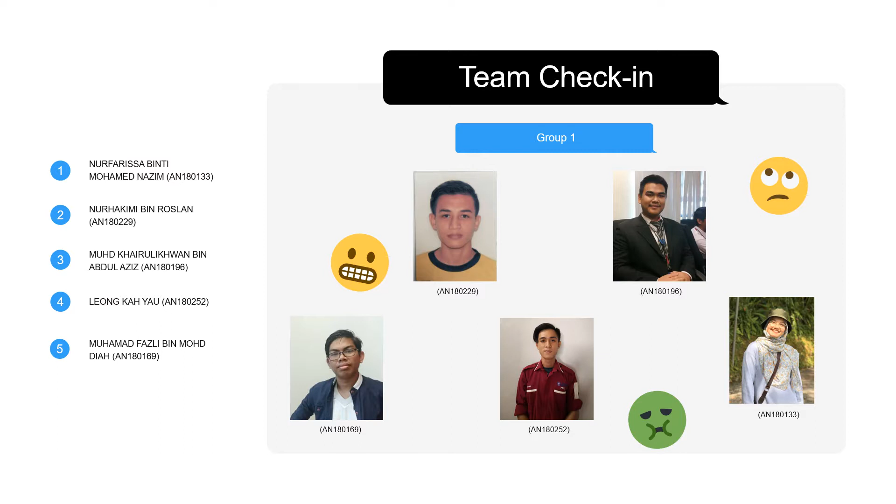Today I will present regarding the infrastructure part in our project. So without further ado, I will introduce to you all about this company.

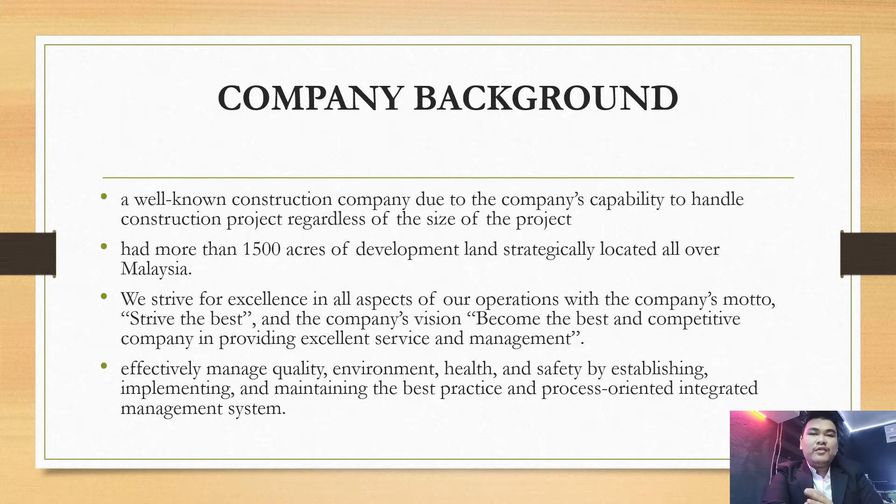Our company is a well-known company capable of building large areas of sites, where we can handle more than 1500 acres of land across Malaysia, and we target to make it full in quality, safe in environment, and safe in health. So next, we move to the project background.

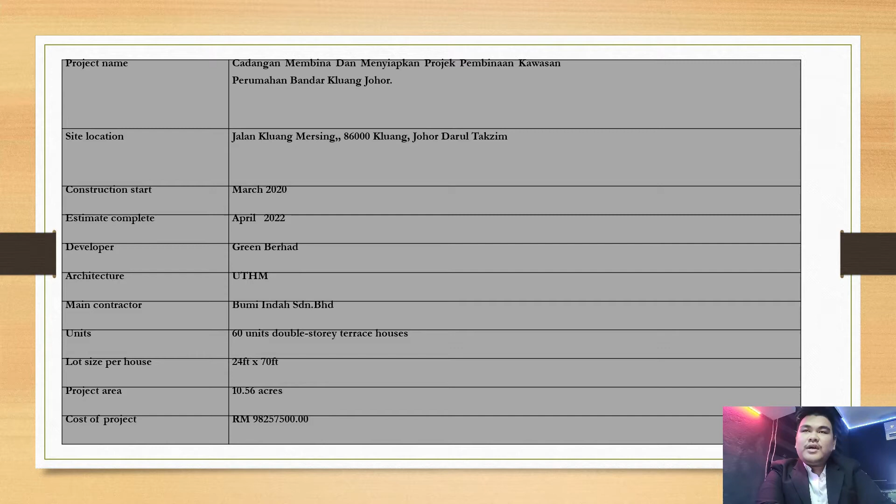In the project background, the project name is Cadangan Membina Perumahan, and the site area is around Kluang, Jalan Kluang and Mersing, where the project will start in March 2020 and end by April 2022.

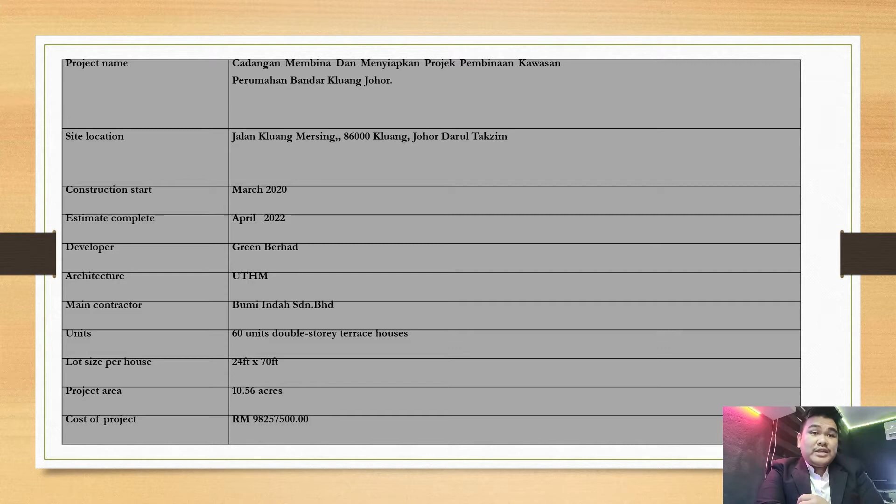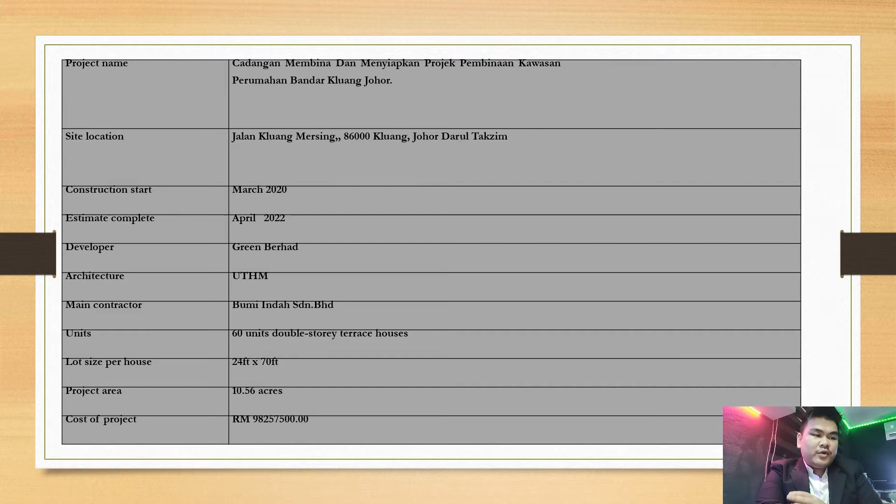The developer is Green Berhad, and the architect is UTHM, and the plan is to build 60 units of double storey houses where the house lot is around 24 feet by 70 feet for each house, and the area for this project is 10.56 acres.

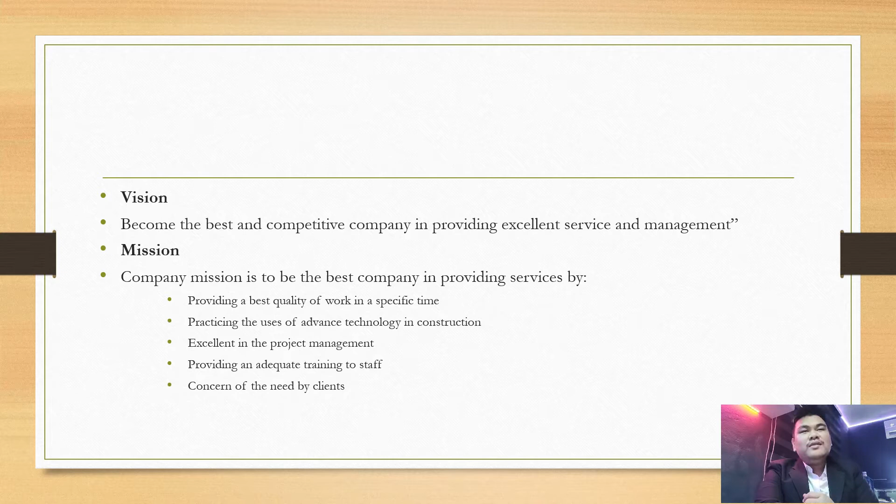Our vision for our company is to become the best and most competitive company across Malaysia. And the mission is to provide the best quality using technology in our construction and so on.

Now I will talk about the infrastructure activities involved in our project.

First of all, for the earthwork, for the proposed level, enough temporary drainage should be supplied during the building of earthworks. The earthworks contractor should examine the drainage solutions that are necessary and utilize their expertise and experience to guarantee that the temporary drainage provided is adequate.

The proposed level chosen for this project is 56.12 meter. This is because, according to the earthwork arrangement, the proposed level closest to the sedimentation pond is 56.12 meter. As a result, by maximizing the appropriateness of excavated material and minimizing the possibility of material corrosion or work instability, this also ensures the success of the earthworks.

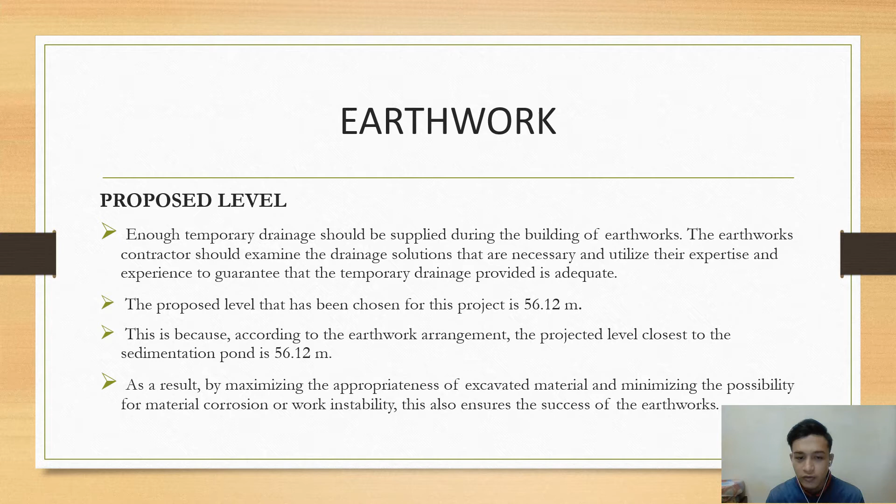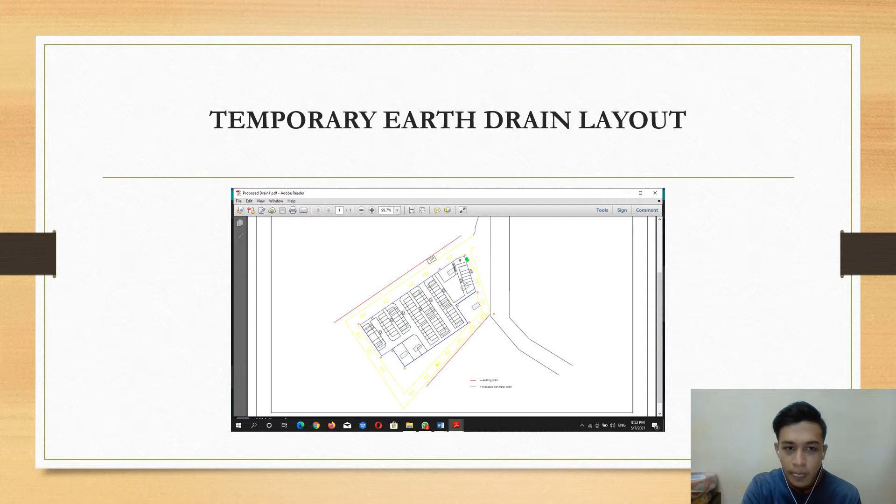For the proposed sedimentation pond location, the use of temporary ponds for sediment management is commonplace on many building sites. After the construction phase, these ponds are occasionally rebuilt and utilized as permanent stormwater control ponds. Additional depth is necessary for sediment storage in between cleanout processes. As a result, the proposed sedimentation pond's closest platform level is 56.12 meter, and the proposed sedimentation pond's depth is 2 meter. So the sedimentation pond's level has risen to 54.12 meter above sea level.

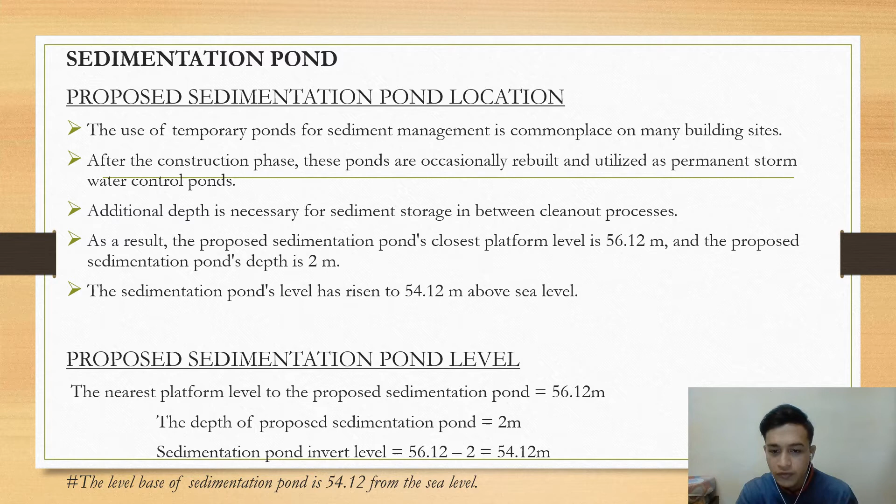The proposed sedimentation pond level: the nearest platform level to the proposed sedimentation pond is 56.12 meter. The depth of the proposed sedimentation pond is 2 meter, and the sedimentation pond invert level is 56.12 meter minus 2 meter, giving a value of 54.12 meter. So the base level of the sedimentation pond is 54.12 meter from sea level.

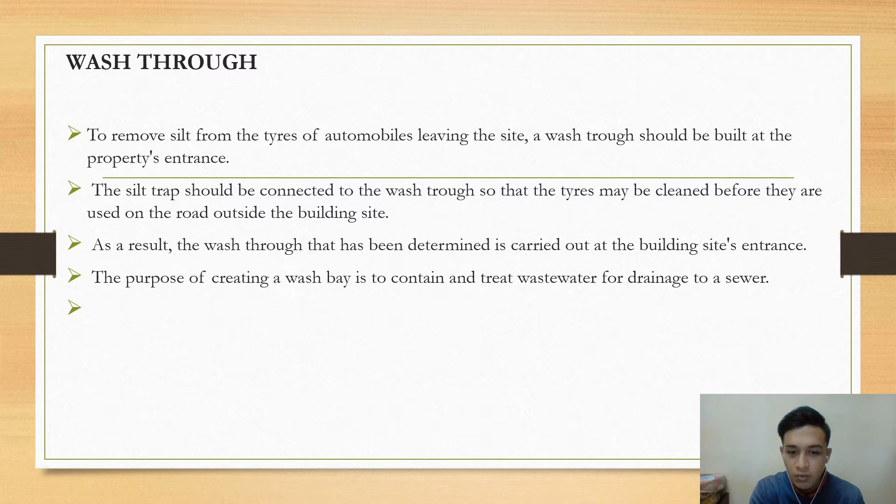Wash through: to remove silt from the tires of automobiles leaving the site, a wash trough should be built at the property's entrance. The silt trap should be connected to the wash trough so that the tires may be cleaned before they are used on the road outside the building site. As a result, the wash through determined is carried out at the building site's entrance. The purpose of creating a wash bay is to contain and treat wastewater for drainage to a sewer.

Grid method: the grid method involves drawing a uniform grid onto a plan of the earthworks project and taking off the existing and proposed ground levels at each grid node. With these values, the average depth of cut or fill required on each cell of the grid is calculated, and the volume for each cell is obtained by multiplying the depth by the cell area. Adding the volumes for each cell together, the total cut and fill volumes for the project can be estimated.

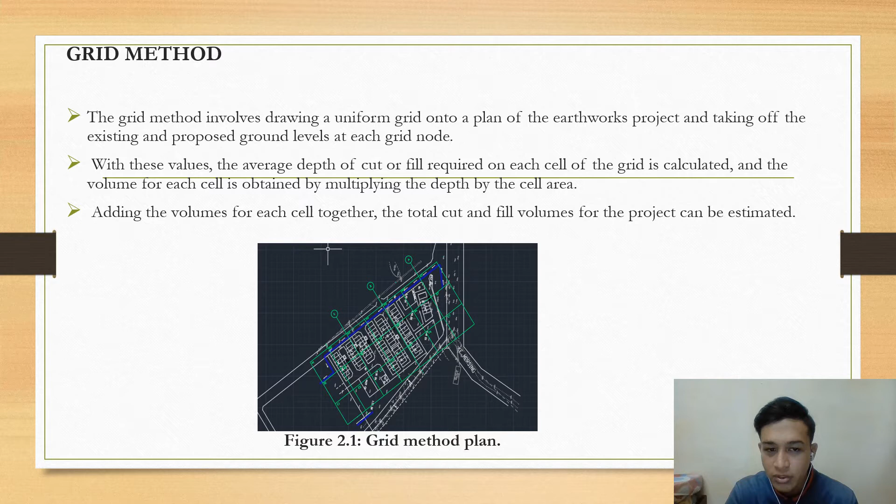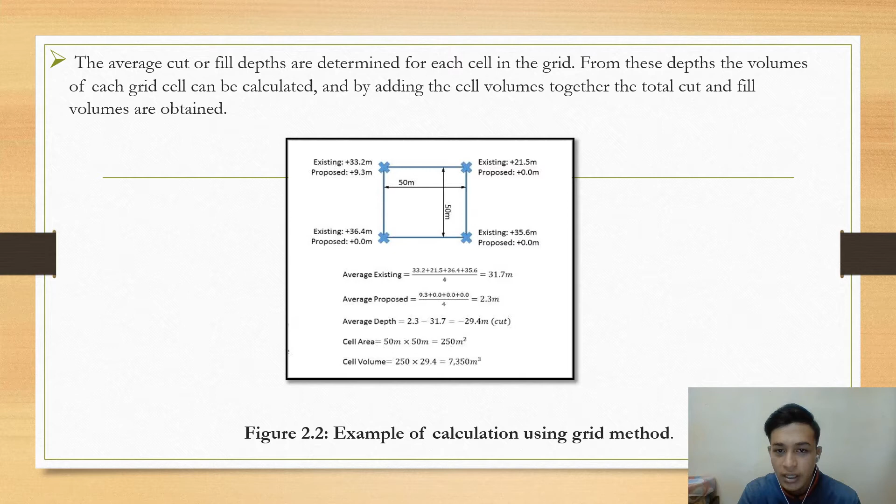The average cut or fill depth is determined for each cell in the grid. From this depth, the volumes of each grid cell can be calculated, and by adding the cell volumes together, the total cut and fill volumes are obtained.

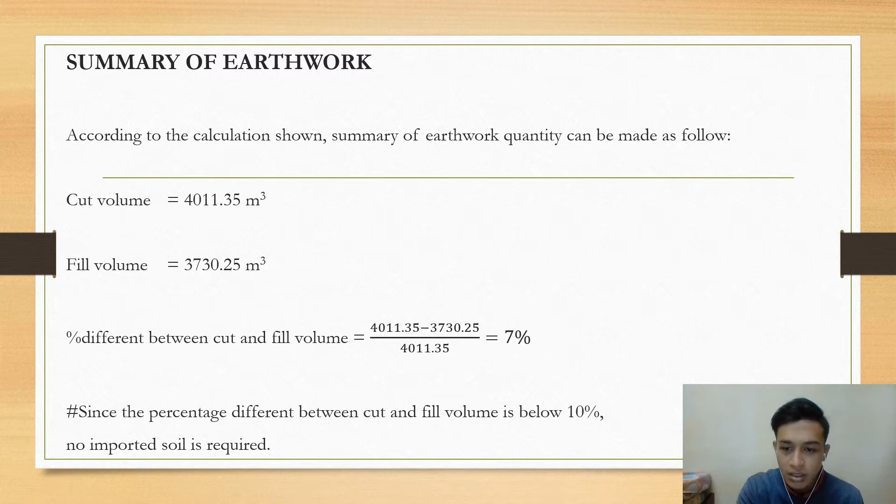Next, we go to the summary of earthwork. According to the calculation shown, the summary of earthwork quantity can be made as follows: cut volume is 4,011.35 meter cube, fill volume is 3,730.25 meter cube, and the percentage difference between cut and fill volume is 7%. Since the percentage difference between cut and fill volume is below 10%, no imported soil is required.

Right, so I'm going to continue with the water reticulation.

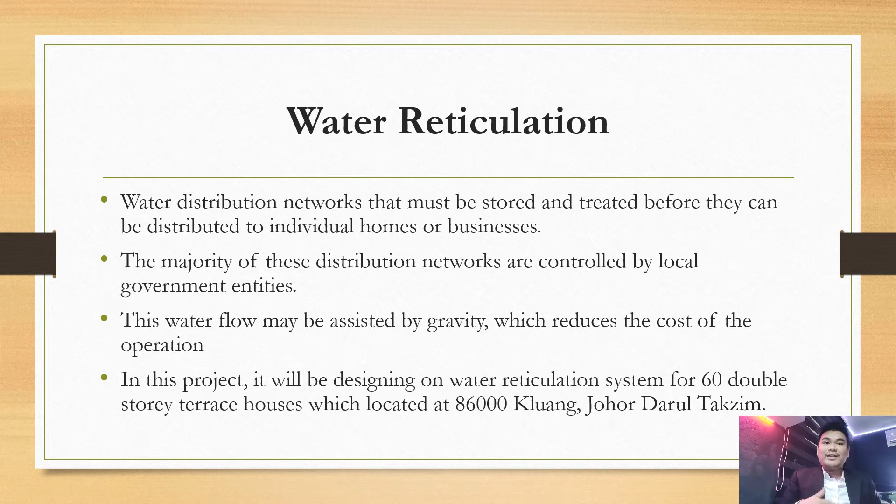So what is water reticulation? Water reticulation is a system of distribution networks of the water, usually controlled by local government entities, and water flow is controlled by using gravity, as we can reduce the cost in construction of the water reticulation itself. So in this project, we are designing for 60 double story houses, and we are planning to cut all of the costs and become environmentally safe.

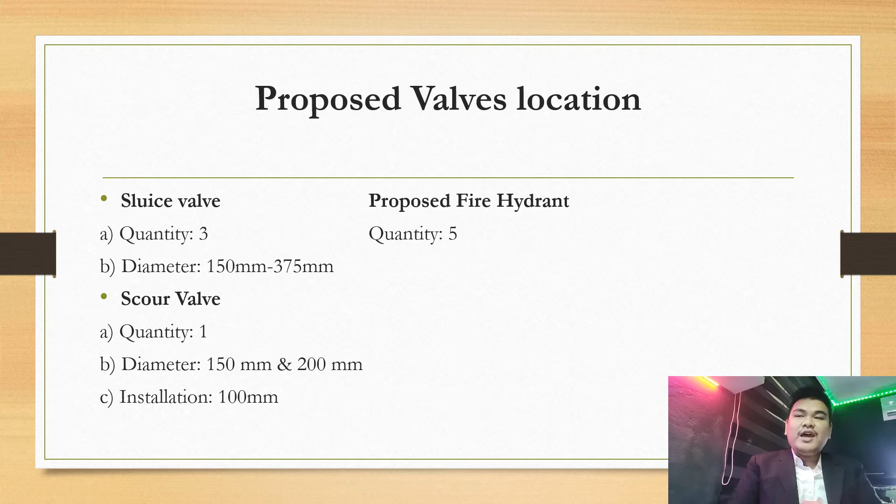Next, we continue with the proposed valves location. The sluice valve proposed quantity is 3, with diameter 150 to 375 millimeters. The scour valve proposed quantity is 1, with diameter 150 and 200 millimeters, and installation around 100 millimeters. For the fire hydrant, proposed quantity is around 5.

105,890 liters. So the new proposed level for our site is 62.63 meters, and the existing is also 62.63 meters. So we can see here that the distance of the tapping point to bulk meter is around 5 meters, and distance from bulk meter to suction tank is around 7 meters.

And then having a calculation of the tapping point to bulk meter, the residual head pressure at bulk meter is around 27.596 meters, and the bulk meter to suction tank, the residual head pressure at bulk meter is around 27.592. So this value is acceptable for our water reticulation proposed system.

So that's all from me. We continue with the next slide.

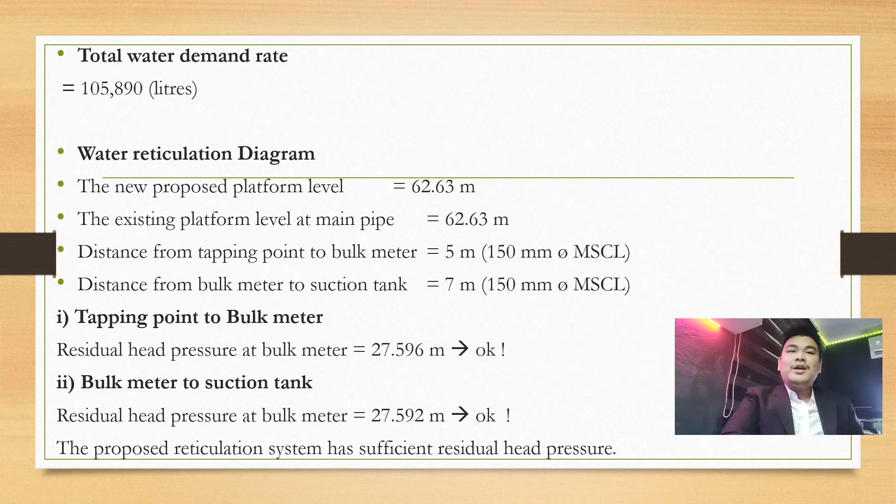Okay, next I will explain about sewage. The proposed sewerage design detail: the sewerage line will be installed along with manhole. The sewerage is installed at high place, and the end is at STP, where STP is the lowest place.

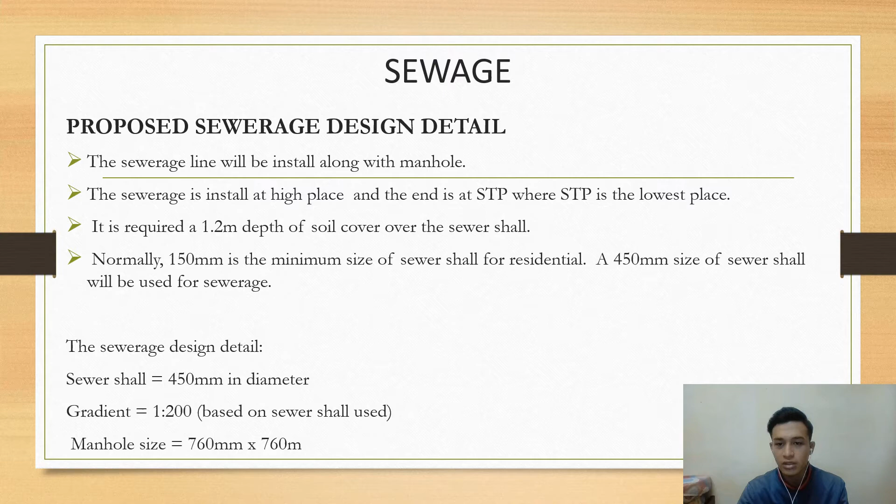Okay, next, this is the example calculation for MH1. Platform level is 64.8 meter, while manhole depth is 1.5 meter. So to get the invert level, platform level minus depth: 64.8 minus 1.5, and the value of the invert level is 63.3 meter.

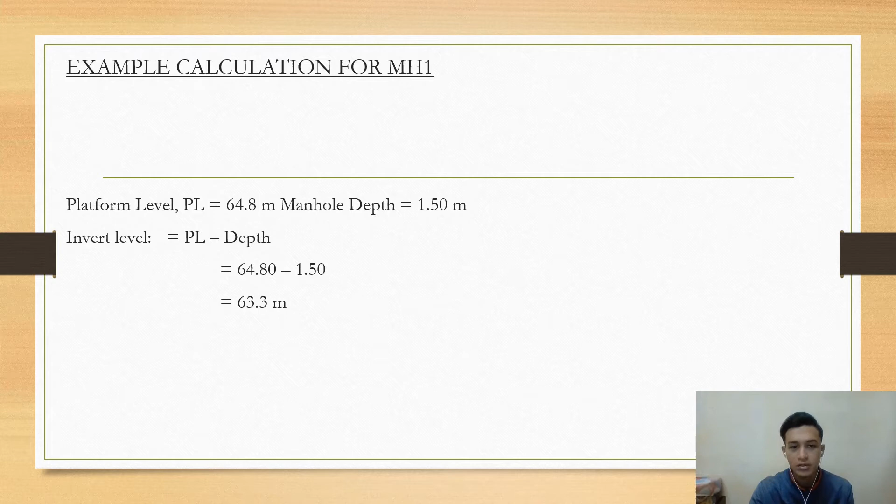Okay, next, the example calculation from MH1 to MH2. The value of x is 25 divided by 200 equals 0.125 meter. So the depth of MH2 equals depth of MH1 plus x: 1.5 plus 0.125, and the value is 1.625 meter.

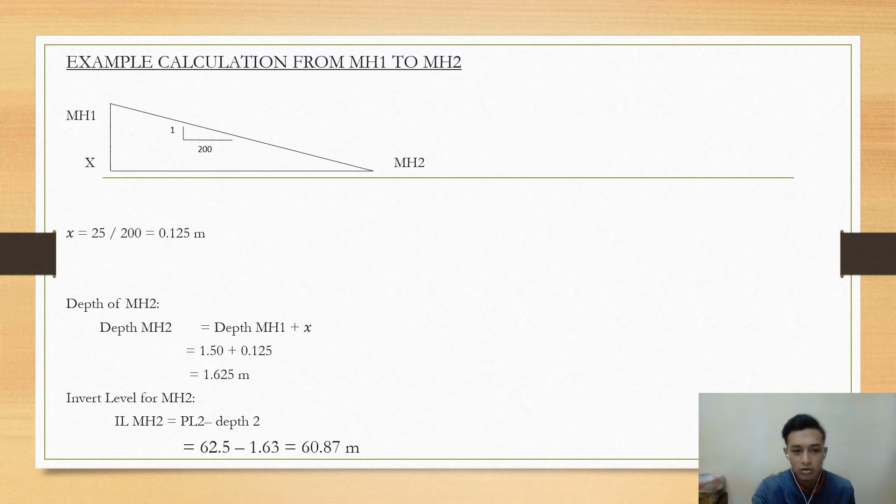Okay, next, for the invert level for MH2, it equals PL2 minus depth 2. So 62.5 minus 1.63, and the value of invert level for MH2 is 60.87 meter.

Okay, this is the sewerage flow direction. The red arrow is the sewerage flow direction for our project.

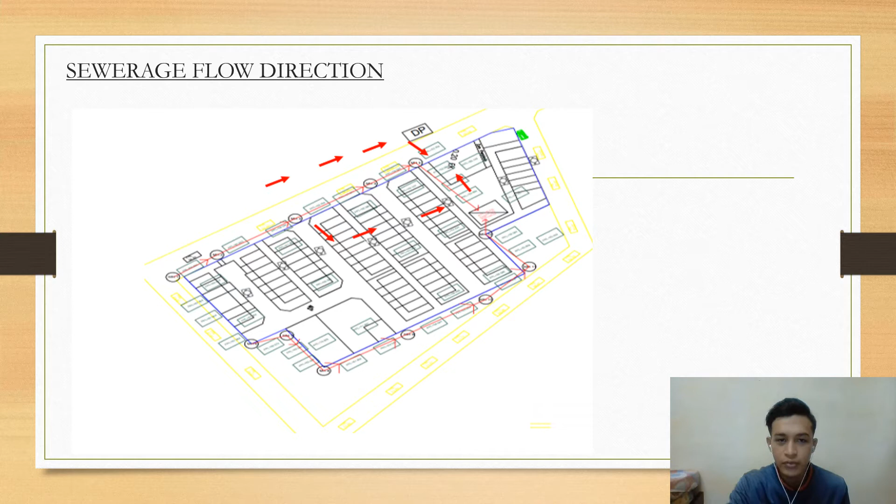Okay, next, the proposed sewerage treatment plant, STP. The wastewater which is discharged by sewerage line will flow to the collection center, which is called sewerage treatment plant, STP. STP will remove any contaminants from wastewater, and it is located at the lowest place so that the wastewater can flow directly into it.

The detail of STP proposed level is stated below. Based on the invert level of manhole, the proposed platform level is 49.2 meter. The depth of proposed STP is 2.57 meter, and the STP invert level is 46.63 meter.

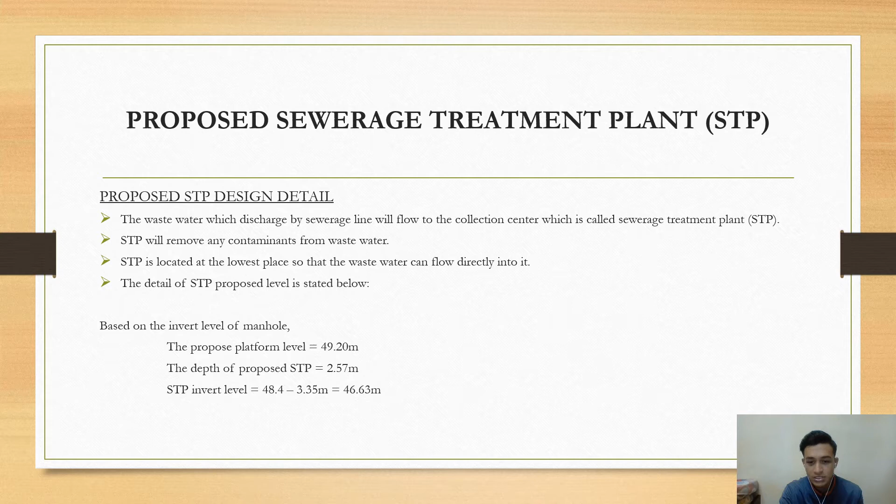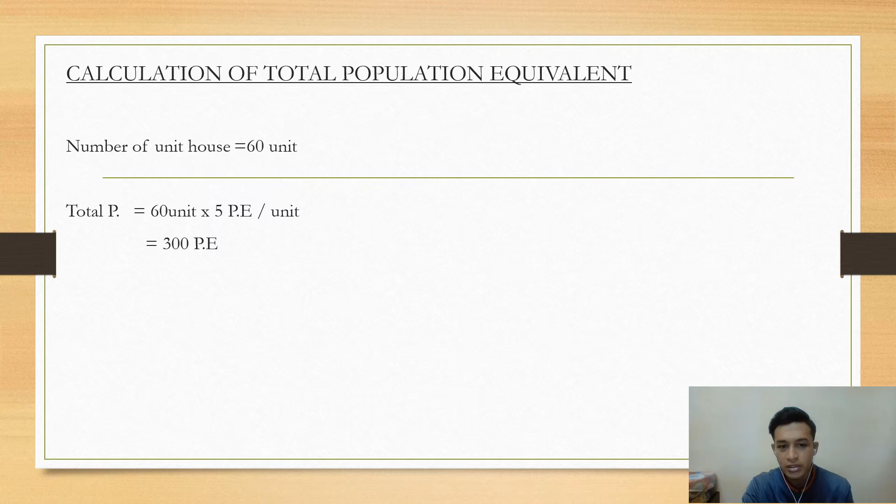Thank you. Hi everyone, my name is Leong Kai Yao. Now I will continue with the part of structure for this project.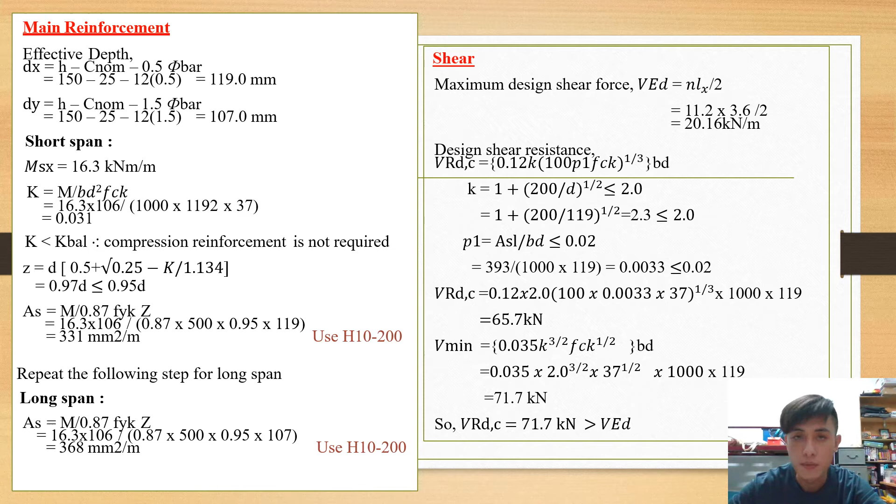The next step is for the deflection. We calculate for it, and also carry out the cracking check, and the result is satisfactory. So finally we can get the detailing for this two-way slab, also using reinforcement with H10 200.

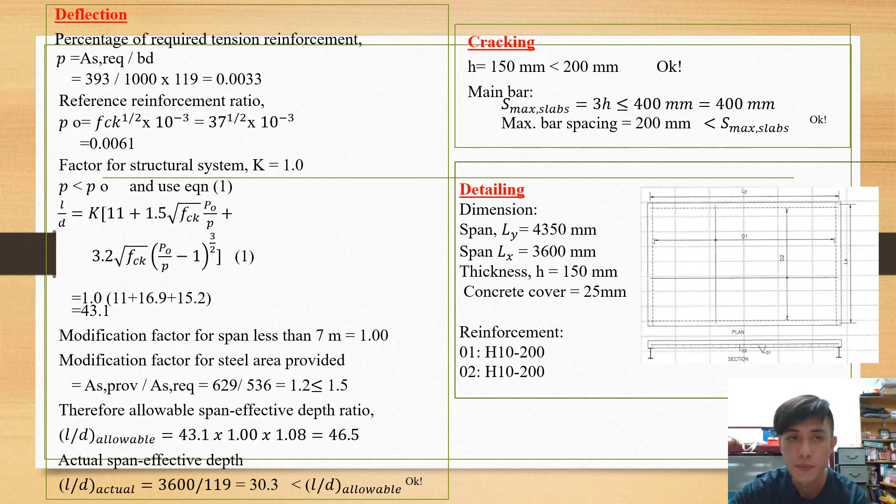As you can see in the figure, our chosen beam is beam 3/A-B, which has an effective span of 3450 mm. The characteristic permanent action on the beam is 15 kN per meter, and the characteristic variable action is 10 kN per meter, with design life of 50 years, fire resistance of R60, and exposure class XC1.

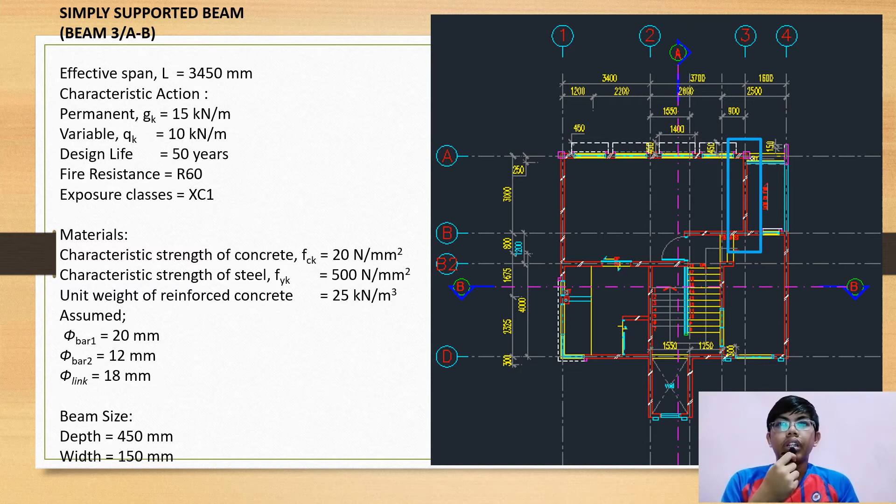The material used in the beam has characteristic strength of concrete of 20 Newton per mm square, characteristic strength of steel of 500 Newton per mm square, and unit weight of reinforced concrete of 25 kilonewton per meter cube. The assumed diameter of bar is 20 and 12 millimeter, and diameter of link is 18 millimeter. The beam size for this project is 450 mm depth and 150 mm width.

First, we calculate the durability, fire and bond requirement of the beam. The minimum concrete cover regarding bond is 20 mm. Minimum concrete cover regarding durability is 15 mm. The minimum required axis distance is 40 mm.

The minimum concrete cover regarding fire can be calculated from the minimum axis distance minus diameter of link minus diameter of bar divided by 2, giving us 22 mm. The allowance in design for deviation is 10 mm, and nominal cover is calculated as C minimum plus design deviation, giving us 32 mm. So in this project, we use the nominal cover of 35 mm.

Next, the calculation for loading and analysis. First is the beam self-weight calculation.

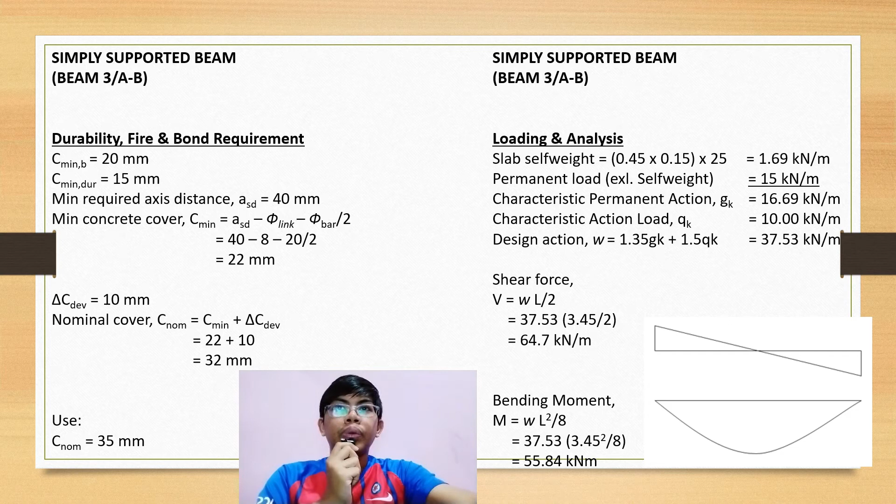We can get the self-weight by multiplying the beam height, width, and 25 with the unit weight of reinforced concrete, and we get 1.69 kilonewton per meter. The permanent load excluding the self-weight of the beam is 15 kilonewton per meter from previous calculation, so the total characteristic permanent action is 16.69 kilonewton per meter.

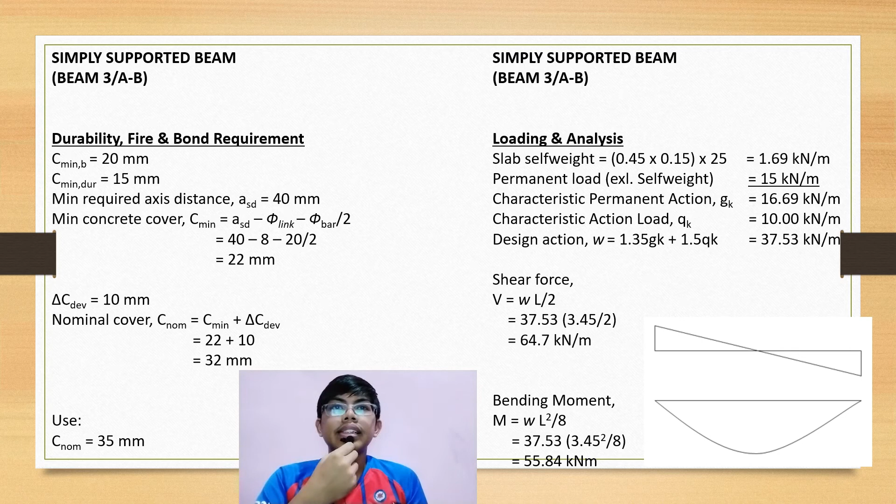The characteristic variable load is 10 kilonewton per meter from the requirement before. The design action is calculated from W equal to 1.35 GK plus 1.5 QK, giving 37.53 kilonewton per meter. The shear force and bending moment for the beam are calculated from V equal to WL over 2 and M equal to WL squared over 8, giving a shear force of 64.7 kilonewton and a bending moment of 55.84 kilonewton meter.

Next, the calculation for main reinforcement. First is the effective depth, calculated from D equal to H minus C nominal minus diameter of link minus diameter of bar, giving an effective depth of 387 mm. Then D prime is calculated from C nominal plus diameter of link plus diameter of bar divided by 2, giving 49 mm.

The design bending moment from previous calculation is 55.84 kilonewton meter. Then we calculate the K value from K equal to M divided by BD squared FCK, giving 0.124. Next, the calculation of K balance using the formula stated in the slide gives 0.167. Since K balance is bigger than the K value, compression reinforcement is not required.

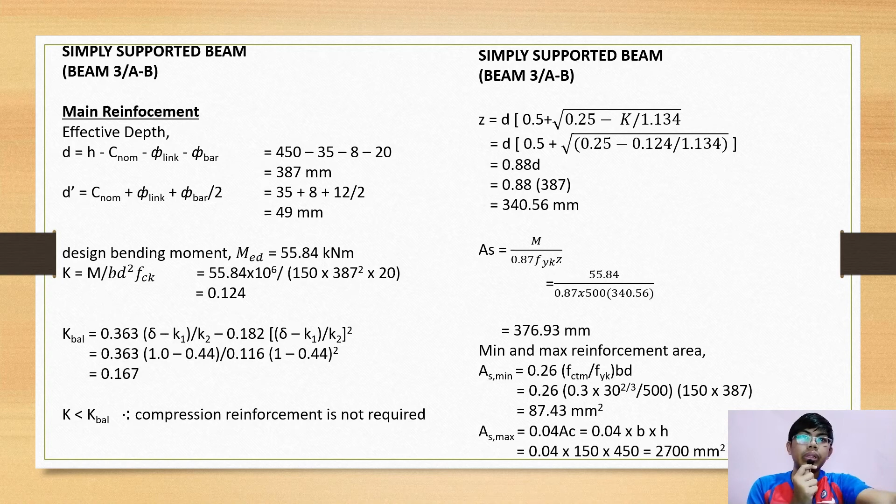Next, we calculate the Z value from the equation, giving 340.56 millimeter, and the area of reinforcement is 376.93 mm squared. The minimum reinforcement area from the calculation equation is 87.43 mm squared, and the maximum reinforcement area, from multiplying 0.04 by height by width of the beam, is 2700 mm squared.

Next, the calculation for shear reinforcement. The design shear force from previous calculation is 64.74 kilonewton, and using that value we calculate the concrete strut capacity, which from the equation gives two answers: 110.34 kilonewton when using the angle of 22 degrees and cotangent angle of 2.5, and 160.22 kilonewton when using 45 degrees and cotangent of 1.

Since the design shear force is below the concrete strut capacity, the angle used for the beam is below 22 degrees. Using the calculation of degree equal to 0.5 sine, we get an answer of 9.94 degrees.

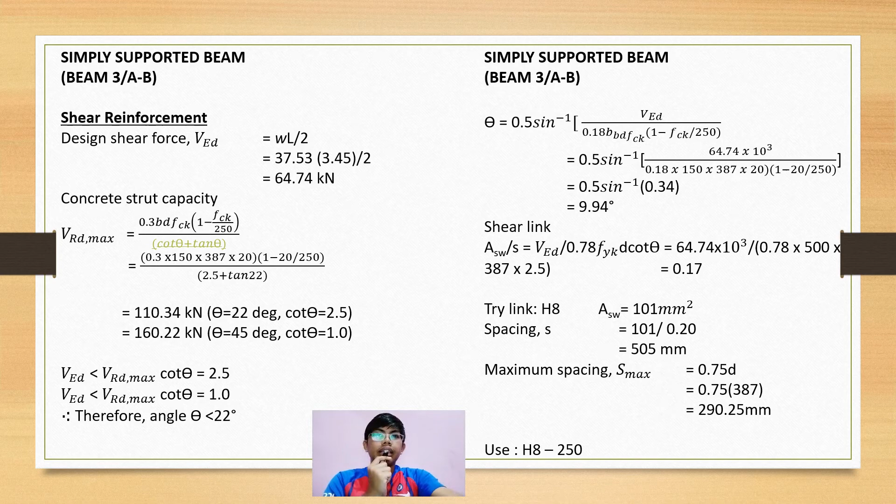The shear link calculation gives an answer of 0.17, so we try link H8 with an area of shear of 101 mm squared. The spacing is found by dividing 101 over 0.20, giving 505 mm, with a maximum spacing of 0.75d giving 290.25 mm. So in this beam, we use H8 link with spacing of 250.

The minimum link is also calculated using the formula, giving 0.107, so we use the same H8 link with area of 101 mm squared, and the spacing is 101 over 0.11, giving 918 mm, but this is bigger than 0.75d. So the shear resistance of minimum link from that equation gives 152.44 kilonewton. Since the minimum shear resistance is bigger than the shear force, link arrangement is not required.

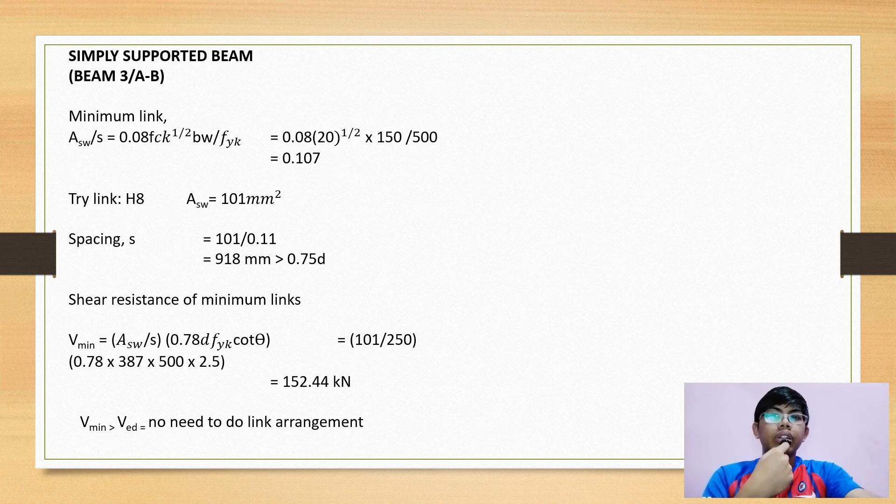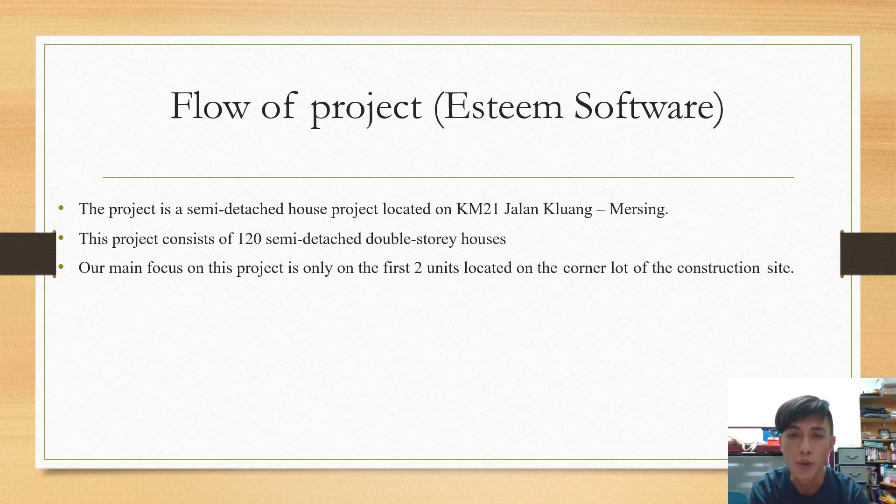For the flow of the project, using Esteem software, this project is a semi-detached house project located at KM 21 kilometer from Jalan Kluang – Mersing. This project consists of 120 semi-detached double story houses, designed for residential use as double storey houses. Our main focus on this project is only on the first two units, located on the corner lot of the construction site.

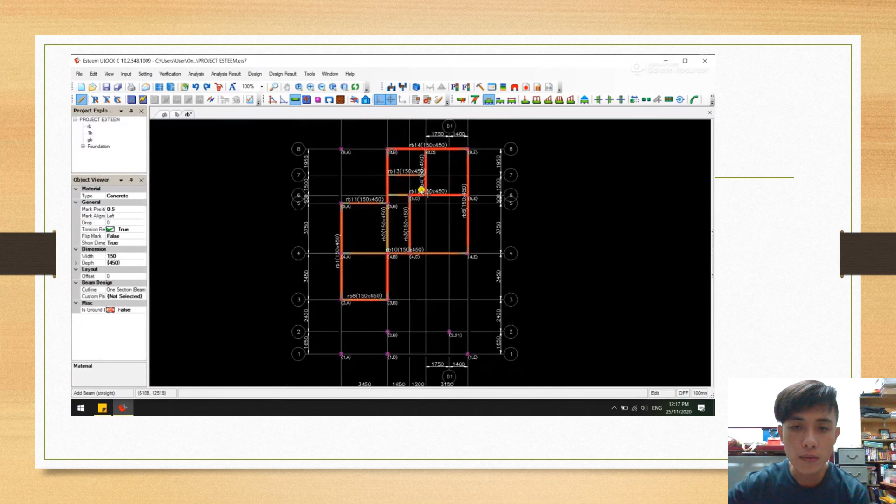In order to design this building, we need to specify the parameters for the design correctly, to prevent any incorrect result. For this, we specify the design of the building by designing all the columns, the foundation, and also the roof and the slab in the building. As you can see in this video, we show the result, and finally we can get the result for this project.

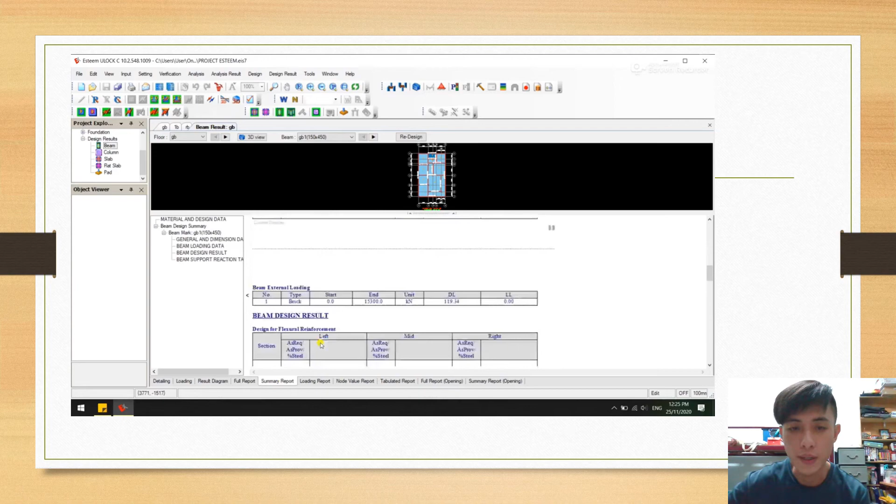In discussion, the first one is the type of foundation. For this project, we are using the pad footing because it is a shallow foundation, which is suitable for residential constructions. The pad footing is very common and widely used in the construction industry. Its advantage is to prevent structural settling and other movement, and to allow building on the ground where otherwise the floor or ground would have insufficient bearing capacity.

As you can see in the diagram, this is the house design for double storey houses. For the slab thickness, in general, slab thickness ranging from 100 millimeter to 150 millimeter is appropriate for residential and commercial constructions. The thickness of slab used in this project is 150 millimeter.

The reinforcement for the slab is T10-250, which has a reinforcement area of 314 millimeter square. The diagram shows an example of the slab thickness of the building.

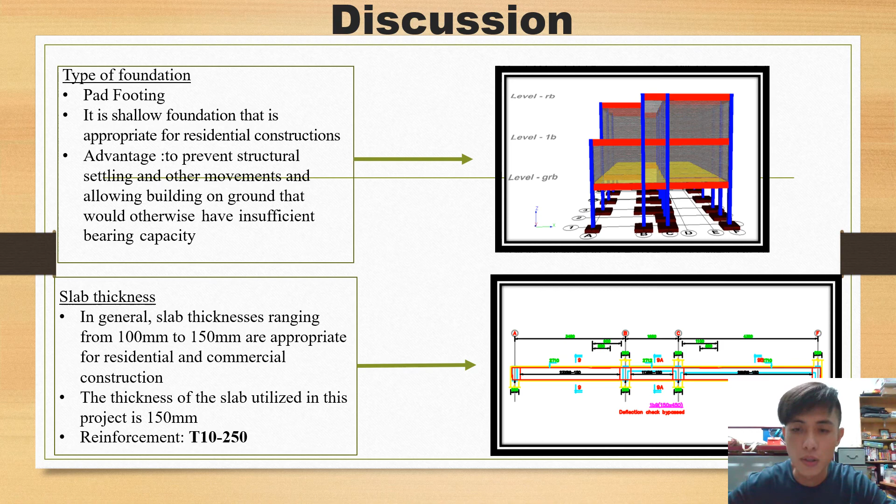Next on the discussion is the type of reinforcement used. In this project, we use deformed steel bar for the reinforcement. It is a steel bar with surface deformation such as spiral shape, herringbone shape and crescent shape, as we can see in the figure. The deformation of the bar improves the connection and friction between the bar and the concrete, giving it bigger fatigue resistance and narrower fracture width. It also has high bonding strength and high flexibility.

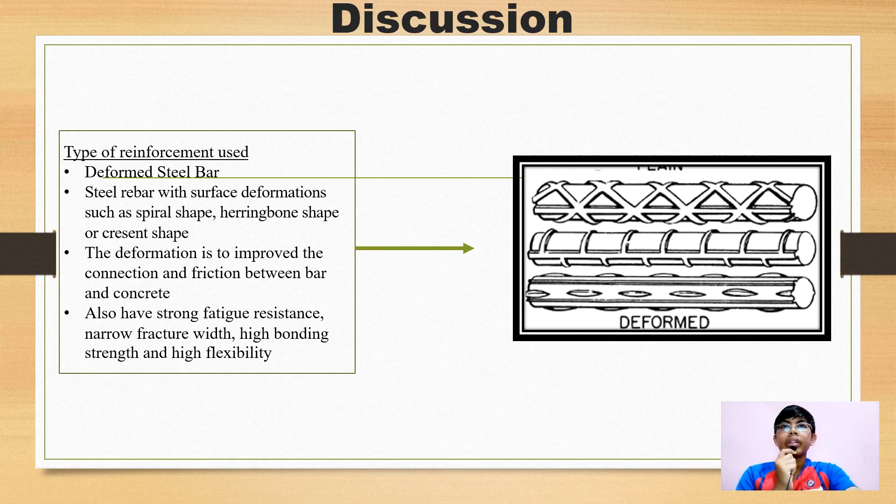For the method statement of site clearing, they use machinery, tools and equipment such as hydraulic excavator, wheeler lorry, dump truck, roller and compactor. For construction procedures, trees within site boundaries are to be removed and replanted according to authorities' requirement. Holes will be backfilled with suitable material.

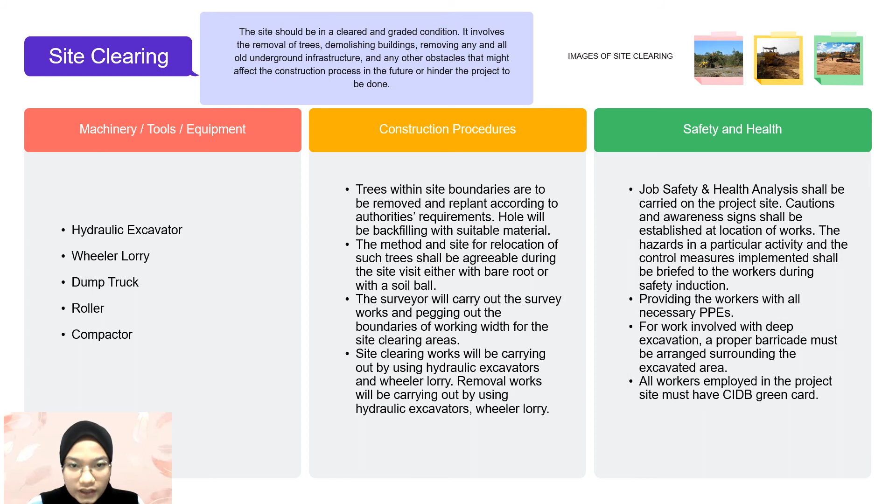The method and site for relocation of such trees shall be agreed during the site visit, either with bare root or with soil ball. The surveyor will carry out the survey works and peg out the boundaries of the working width for the site clearing areas. Site clearing work and removal works will be carried out using hydraulic excavators and wheeler lorry.

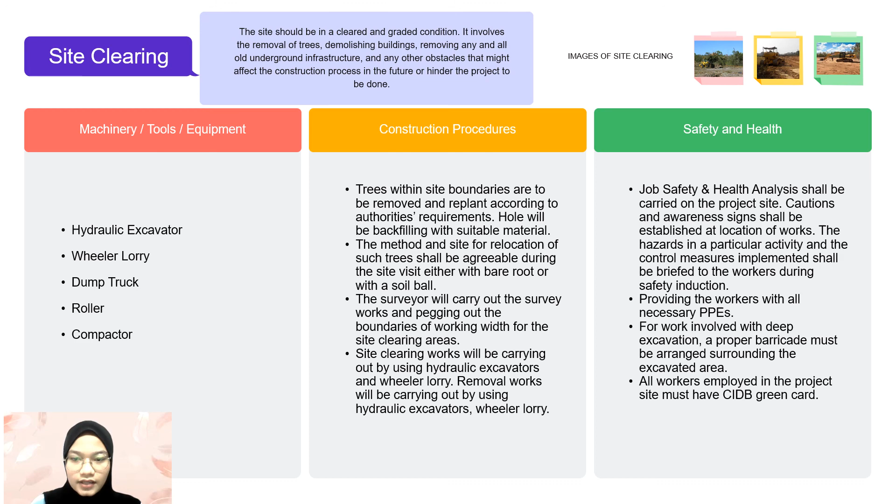For safety and health of site clearing, job safety and health analysis shall be carried out at the project site. Caution and awareness shall be established at location of work, such as signs for hazards in particular activities, and control measures implemented shall be briefed to workers during safety induction, providing them with all necessary PPEs. For work involving deep excavation, a proper barricade must be arranged surrounding the excavated area. All workers employed at the project site must have a CIDB green card.

For the process of road kerb installation, the machinery, tools and equipment used are excavators, tipper or dump truck, vibrator roller, back pusher, concrete grade 20, BRC A6, and precast concrete road kerb for L shape and I shape. The construction procedure: excavation shall be carried out by a backhoe to 230 mm average depth as shown on the drawings, commencing from platform level to form subgrade to receive paving, and removing excavated material from site.

Next, trim, grade, and compact the subbase by roller to the required cambers and gradient. Next, precast concrete kerb shall be cast using steel mold and shall be of the required types. The kerb should be laid with joints as narrow as possible and filled with mortar containing 1 part Portland cement to 2 parts sand. For safety and health of this process, job safety and health analysis should be carried out at the project site.

Caution and awareness signs shall be established at location of work. Hazards in particular activities and the control measures implemented shall be briefed to workers during safety induction. All workers employed at the project site must have a CIDB green card. Lastly, all new workers and staff must attend safety training or safety induction course before commencing work at the site, and attendance shall be recorded in an induction checklist.

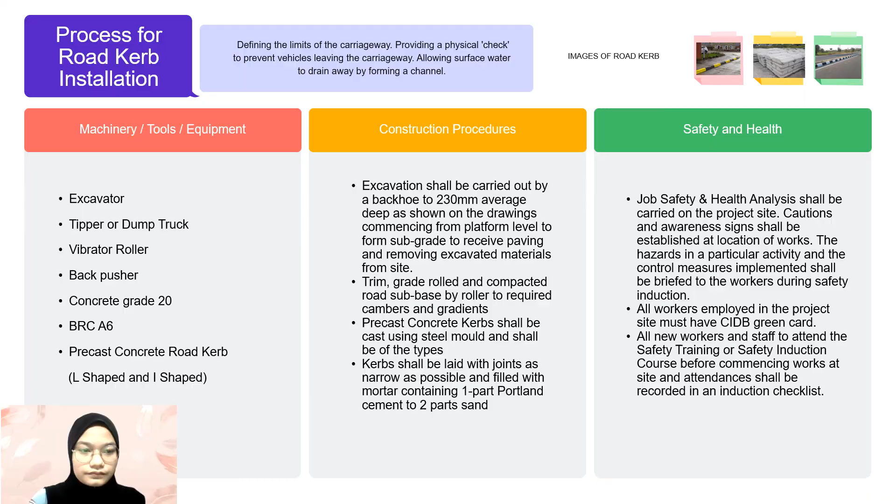For problem solving relating to infrastructure work on site, the first problem the engineers told us is encountering boulders during excavation activities. For this problem, they use solutions such as hacking and chemical demolition using Betonamit. Without explosion, the boulder will crack itself.

The next problem is blow count above pile penetration requirement. For this, the suggested solution is to take measurements to determine if the problem is related to the driving system or soil behavior, and to investigate further solutions. The last problem the engineer told us is piles driving out of location. For this problem, the solution is spudding or pre-drilling of the pile location.